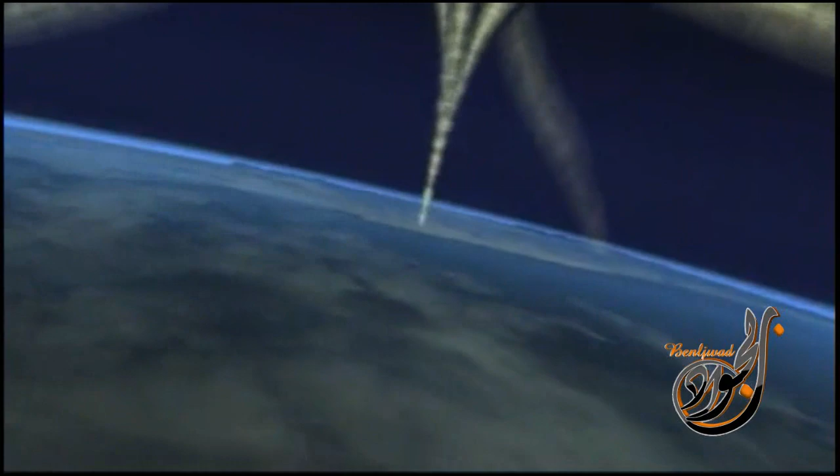With the number of pilgrims to Mecca increasing every year, designing for such large numbers presents a series of key challenges, in particular those of visibility, capacity, and movement.

King Abdullah of Saudi Arabia, the custodian of the Holy Mosque, has embraced this opportunity to address the challenge of improving the facilities for millions of future pilgrims.

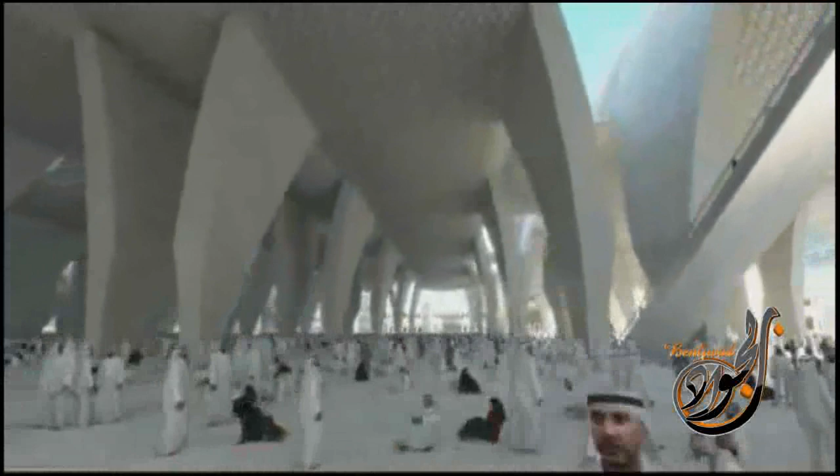The Atkins team has been inspired by this challenge and has addressed each of the key issues. We understand that visibility of the Kaaba is not strictly necessary, but we believe that it would be desirable for as many worshippers as possible.

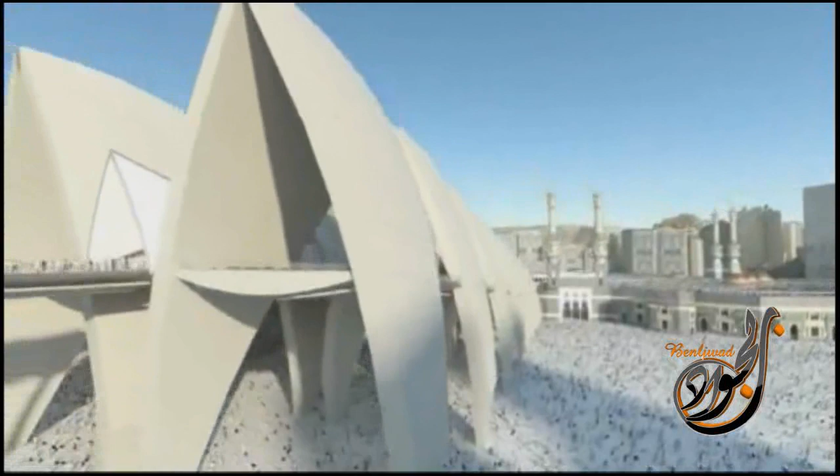To this end, the column grid and sight lines from the upper prayer hall have been designed to offer the best view of the Kaaba.

Movement has been greatly improved, with 60% of the prayer space in shade and easy access to the Kaaba through the new Grand Mosque doors.

Atkins recognizes the historical significance of the existing gateways of the mosque, and subsequently these are retained in this proposal.

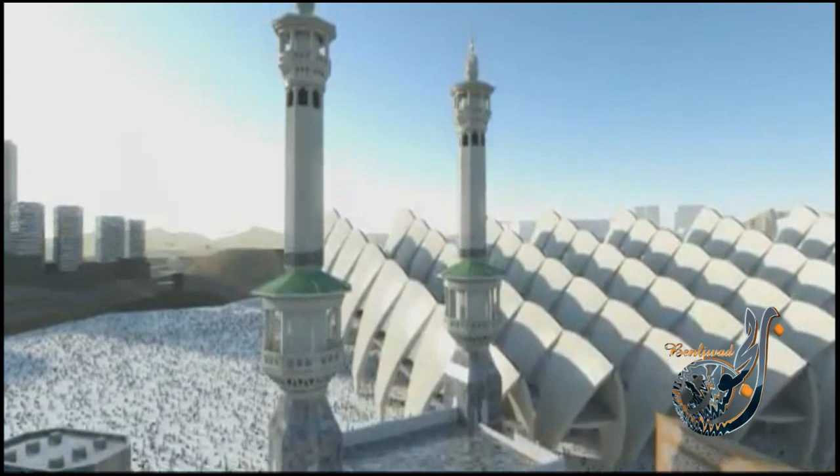The sculptural form of our proposal draws its inspiration from the origins of Islamic architecture and the traditional form of the Islamic pointed arch. The simple form is rotated around its section, and a segment of the resultant shape becomes the new prayer hall shells, the largest of which stands 80 meters high.

These shells then multiply and reduce in size towards the Kaaba, following the sight lines of the upper prayer deck. Each prayer hall is then repeated on a radial grid to create the whole form of Phase 1.

These prayer halls, along with the adjacent plazas, increase the capacity to almost 2 million, providing areas of shaded worship space, all of which have a view of the Kaaba.

The form of the prayer halls could be said to resemble worshippers in prayer.

To accommodate the range of numbers attending the mosque throughout the year, 38-meter-high doors are located at the perimeter of the new Grand Mosque.

These doors, when shut, enclose the space surrounding the Kaaba to effectively reduce the scale of the space during quieter periods of the religious calendar.

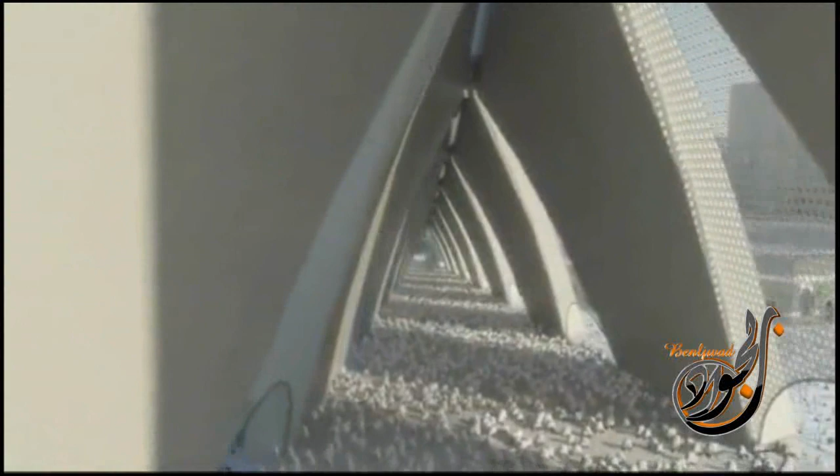The upper prayer halls have floors that are stepped to allow clear visibility of the Kaaba, and due to their arrangement and form, provide areas for quieter contemplation away from the main plaza below.

The steps have been carefully designed to allow for ease of movement and are sufficiently deep to be functional for prayer.

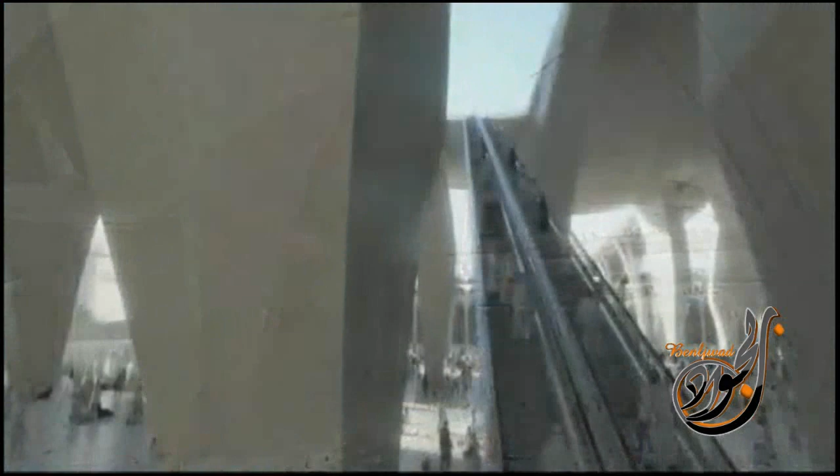These upper levels are primarily accessed over bridges from the hillside terraces and by ranks of escalators arranged between the new prayer hall's main structure.

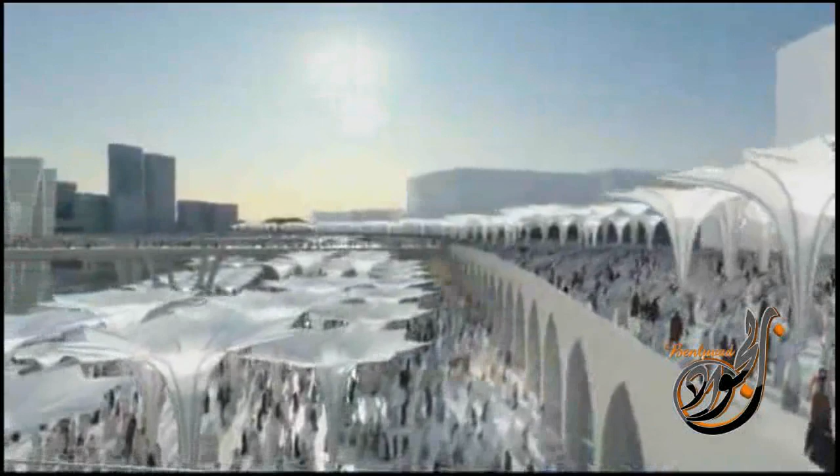By accessing the new extension from the hillside, the crowd is effectively separated from those using the lower plaza. This improves ease of movement and crowd safety.

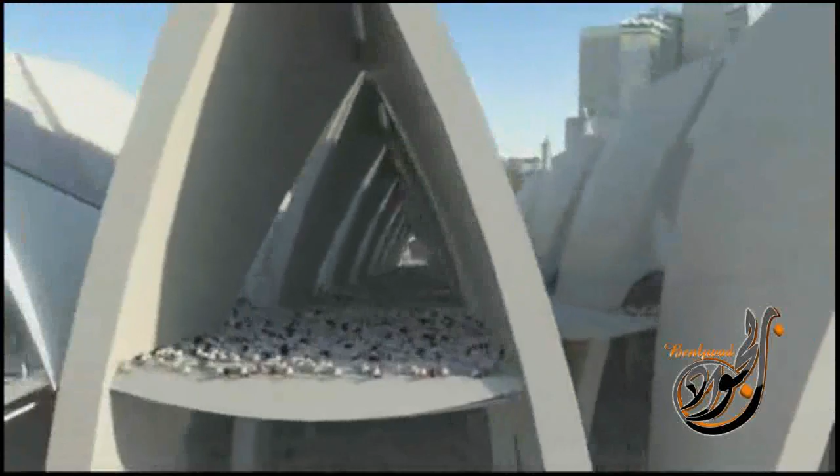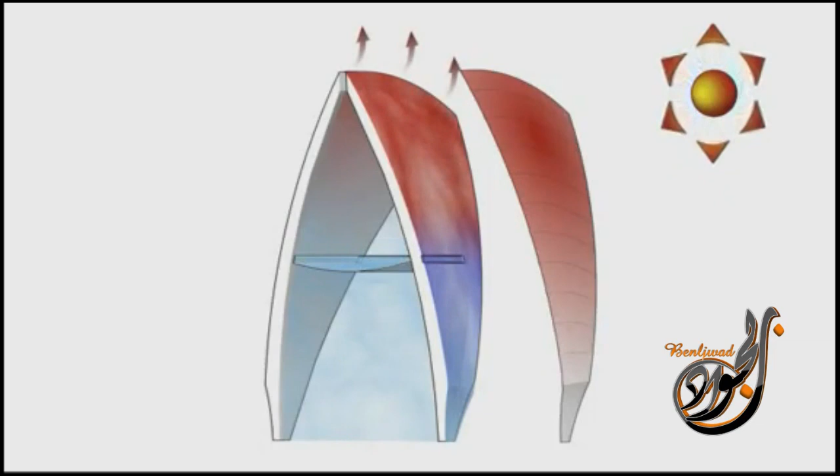A further feature of this proposal is the innovative use of the prayer hall structure shells to act as thermal engines that effectively pull cool air from a lower basement and through the prayer hall slabs to keep them cooled and enhance the comfort of worshippers.

Atkins is proposing a phased construction of the mosque expansion so as to minimize disruption to the functioning of the existing mosque and its surroundings.

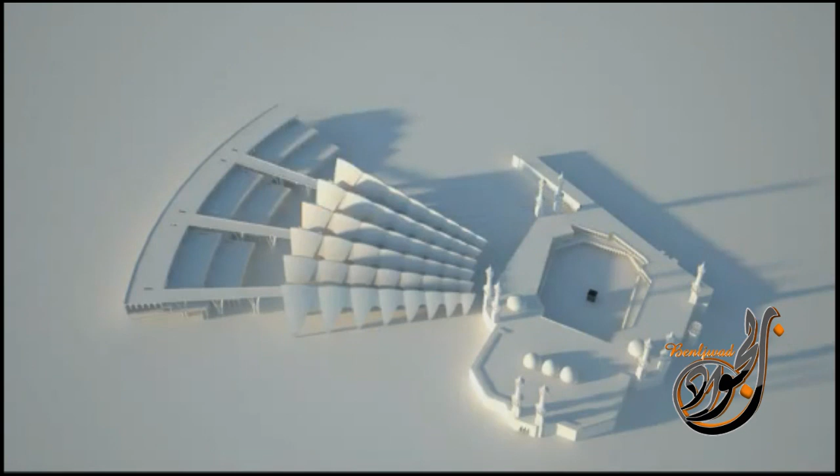The new extension can be built without touching the existing mosque. Once it is finished, the walls and floors of the mosque facing the new extension can be removed and the grand doors installed.

The Ottoman arcade could be left in place, but it would severely restrict the view of the Kaaba from the new prayer halls. We are therefore suggesting that it should be carefully taken down and reconstructed on the hills behind the terraces.

The reconstructed arcade will become an additional worship space and, due to its relevant historic origins, will be closely associated with the existing mosque and Kaaba.

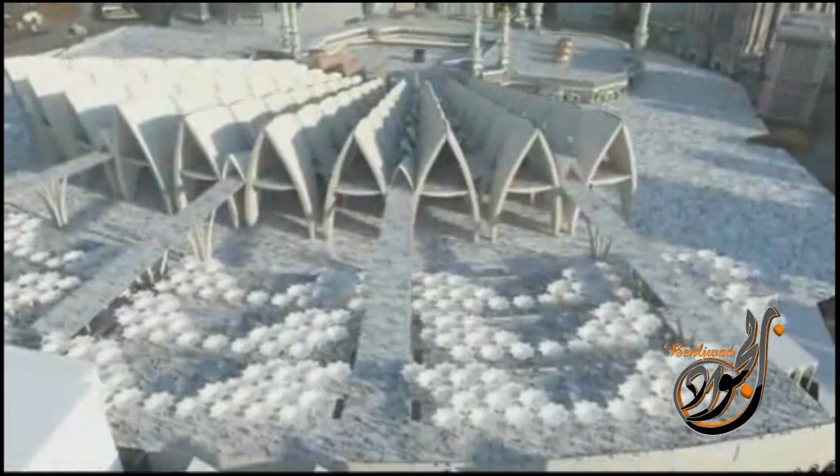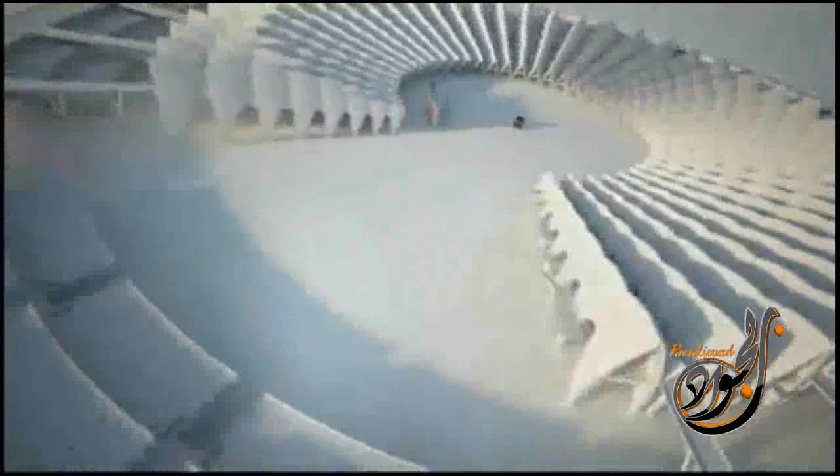The capacity of the mosque is significantly enhanced by the addition of the Phase 1 prayer halls, and though this extension has been designed as a standalone contemporary Islamic building, it could in the future be extended by repeating the same form so as to complete the circle and create a new grand mosque accommodating up to 5 million worshippers.

A truly fitting center for the Islamic world.